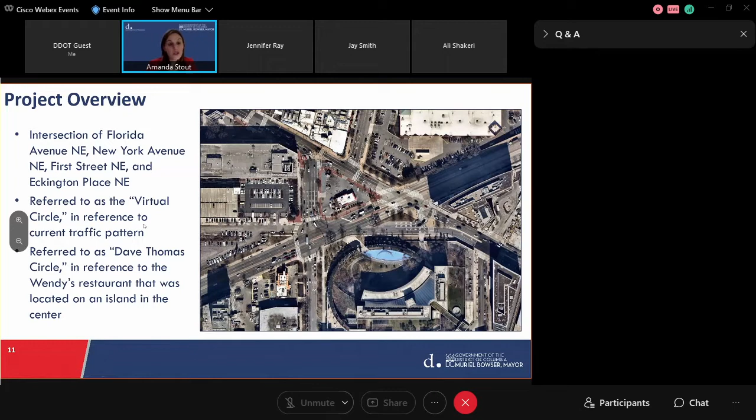So as many of you may be familiar with this project, we are tonight speaking about the intersection of Florida Avenue Northeast, New York Avenue Northeast, First Street Northeast, and Eckington Place Northeast. This area has often been referred to as the Virtual Circle or Dave Thomas Circle, in reference to the Wendy's restaurant that was once located on an island in the center of the intersection.

This series of intersections has been ranked among the top 10 hazardous intersections in the district. It is very challenging, as anyone who has been through this series of intersections understands. Wayfinding is complicated. There's a lot of jockeying for movements among drivers, and it's very difficult for pedestrians and bicyclists to navigate. That is the challenge posed by this existing traffic pattern.

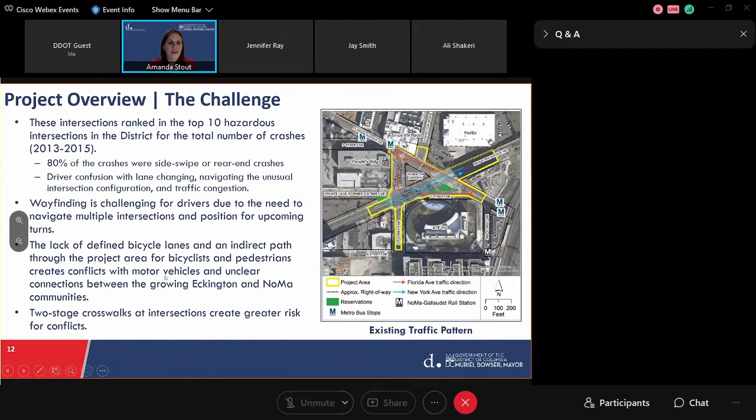And of course, there's a great opportunity for the District of Columbia to improve safety for all roadway users, particularly pedestrians and bicyclists, and to improve north-south and east-west transportation links across the city. This project is focusing on safety, and the reconfigured intersection will also create 3 new public open park spaces that have been designed with a really thoughtful, innovative landscape design, which we'll be talking about later in the presentation.

A brief overview of the history. Some of you on this call may have been involved in meetings in the past; others may be newer to it. Since about 2013, there have been multiple studies and public meetings for both this series of intersections and for the Florida Avenue Streetscape, a separate project from Florida Avenue from 2nd Street to H Street Northeast. That project will be starting construction in the spring of next year.

In 2018, with Mayor Bowser's leadership and funding commitment, she directed DDOT to pursue what was referred to as Concept 6, which meant the district would acquire that Wendy's property at the center of the intersection, and that would unlock the ability to redesign this series of intersections.

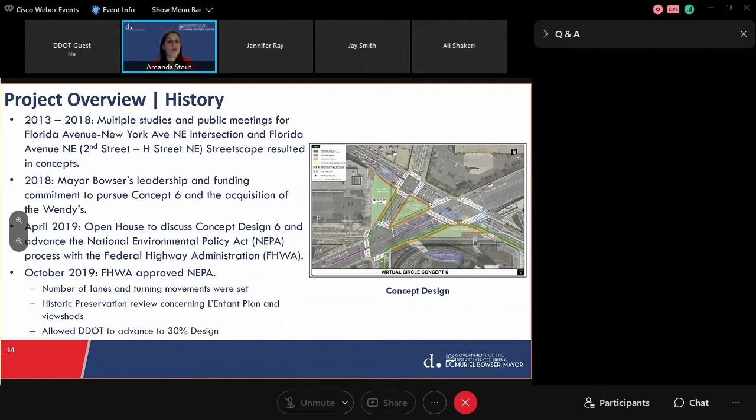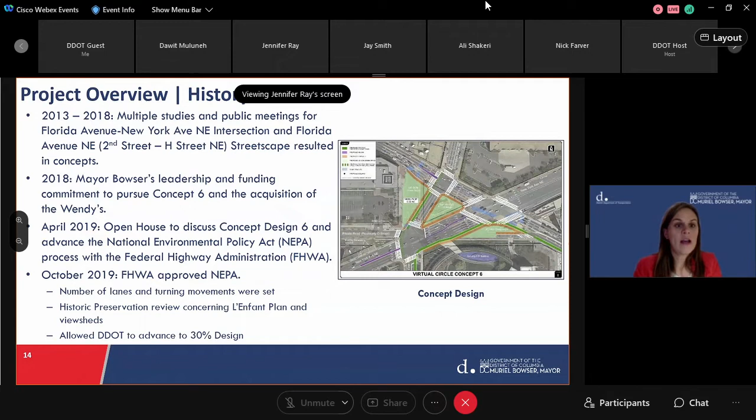From there, DDOT has had several other meetings. We held an open house in 2019 to discuss the NEPA, the National Environmental Policy Act, which was an important milestone for the project. When the Federal Highway Administration approved that portion of the project, that really set in place the number of lanes and the turning movements needed for this project. Historic preservation review was also part of that federal highway review, and at the completion of that mark, it allowed DDOT to advance to the 30% design stage.

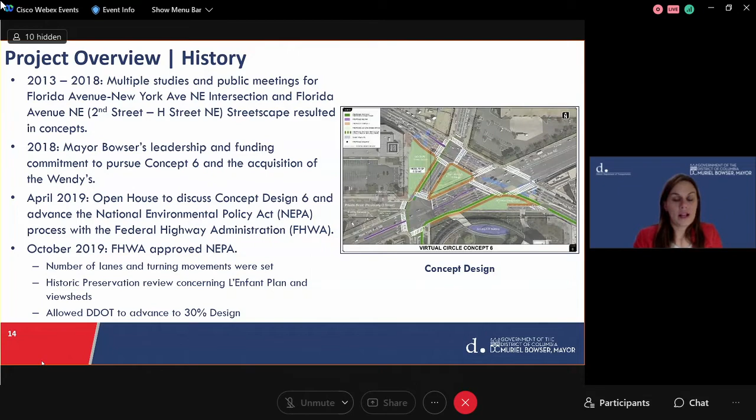DDOT has enjoyed a great partnership on this project with the NOMA Business Improvement District and the NOMA Parks Foundation. In June 2019, they worked with the Urban Land Institute to do a technical assistance panel that came up with some really interesting ideas that pushed this design in some positive directions.

In December 2019, there was a public meeting to talk about the preliminary design. In March 2020, the DC Office of Planning conducted a public life study, which also looked at how people are using this area today and made some great recommendations about how to push the design for the future.

In the spring of 2020, with the NOMA Parks Foundation, there were public meetings to discuss the concept designs for these 3 new public park spaces and how they can best be used by the community, and what types of amenities and urban design characteristics would benefit those spaces. Those spaces were also reviewed by the Federal U.S. Commission on Fine Arts, National Capital Planning Commission, and the State Historic Preservation Office.

Finally, in May 2021, we held a virtual public meeting, much like this, to discuss the 65% milestone design.

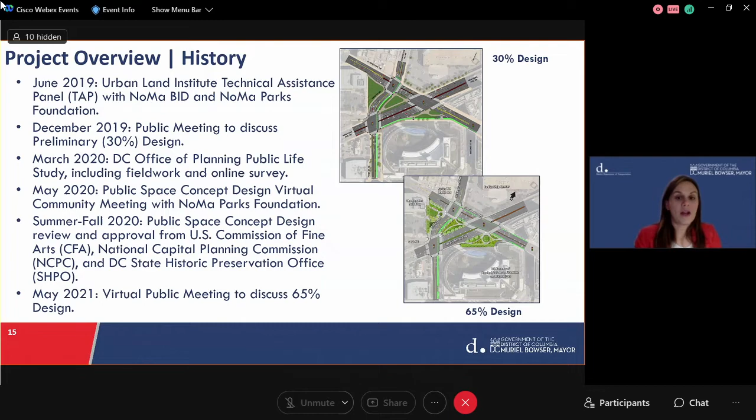Also wanted to talk about property acquisition and relocation. As I mentioned, the property at the center of the intersection needed to be acquired by the district, and we did so in accordance with federal and district regulations. In January 2021, the District of Columbia acquired title to that property by eminent domain.

So this is the final design for the project, a really important milestone in this very significant project. As I've mentioned, the focus of this project is on safety for all users, with particularly significant improvements to pedestrian and bicycle infrastructure. The focus of this redesign is making it safer, clearer, and simpler to travel to and from neighborhoods, travel across the district, and be better connected. New York Avenue and Florida Avenue are principal arterials and important corridors, but this project is not aimed at increasing vehicular capacity. It's aimed at improving safety for all.

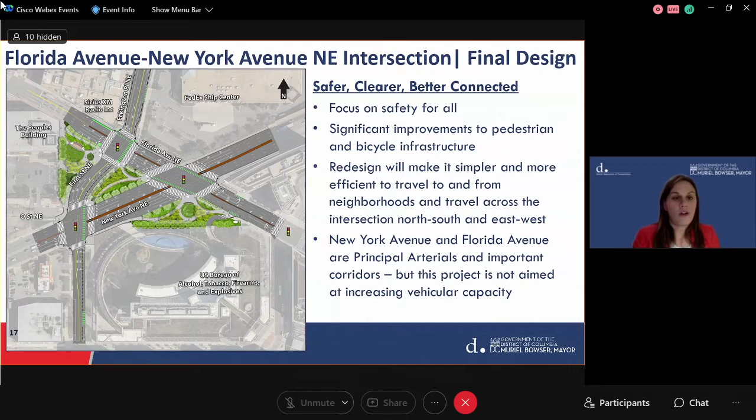We're also realigning and converting First Street Northeast to a two-way street, which will improve north-south connectivity from Noma to Eckington and make it easier for residents to get into and out of the neighborhoods.

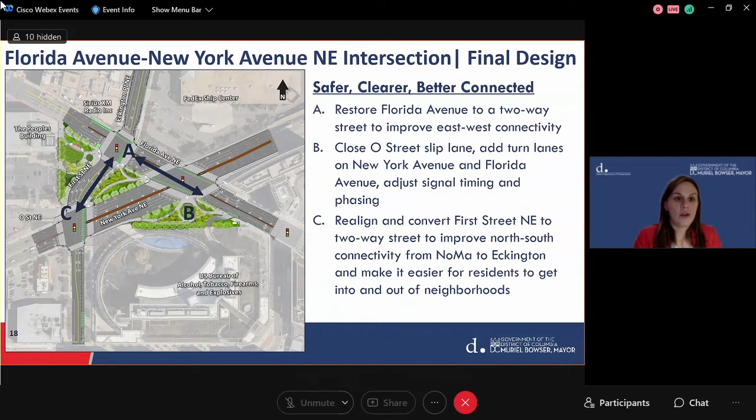Finally, like many DDOT streetscape projects, this project will do a number of other things: adding street trees, replacing street lights, upgrading curbs and ADA accessible curb ramps. We'll be adding new traffic controls, green infrastructure and improving drainage to improve water quality. Also maintaining some historic visual corridors consistent with the L'Enfant plan. So this project, in addition to what's being done in the roadway, is adding a number of other amenities to the streetscape.

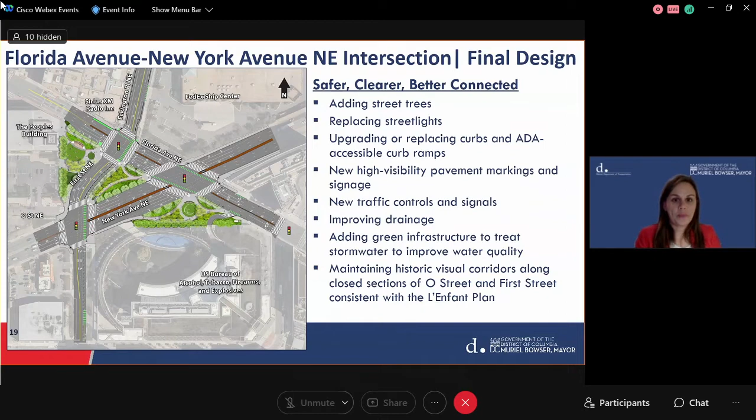Now we're going to talk about some aspects of the project that will benefit some specific modes. I'll start with pedestrians. For pedestrian safety, this new design will have clear, high visibility crosswalks to make the intersection safer and simpler to navigate. There'll be accessible pedestrian signals with leading pedestrian intervals. The medians on New York Avenue and Florida Avenue will be ADA compliant with at least 6 foot wide medians for refuge. By reducing driver confusion and making these intersections line up more clearly and logically, it will improve safety for pedestrians.

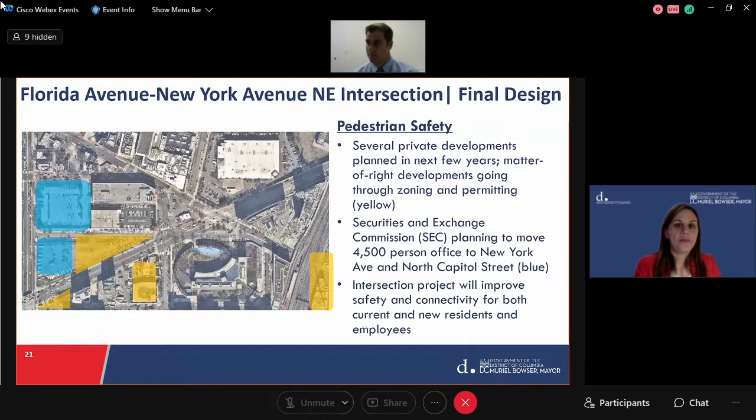And now I'm going to turn it over to Nick Farver from JMT. He's going to talk about a number of aspects of this project that will improve bicyclist safety.

All right, thank you, Amanda. As previously mentioned, bicycle safety and bicycle infrastructure is a major component of this project. Bike connectivity will be improved along Florida Avenue by continuing the protected bike lanes proposed in the 2nd to H Streetscape project and extending them through the intersection to connect First Street and Eckington Place.

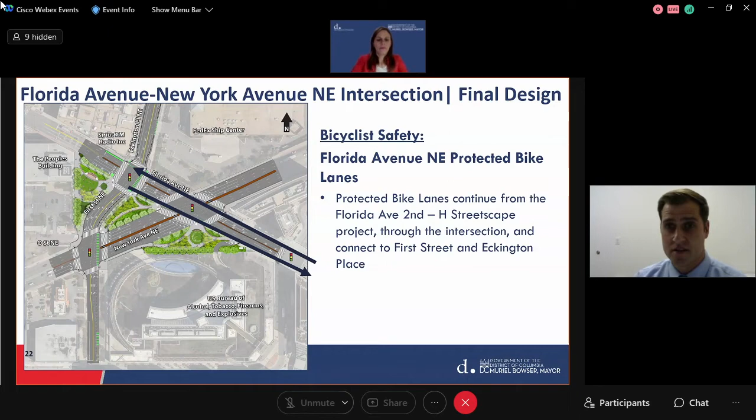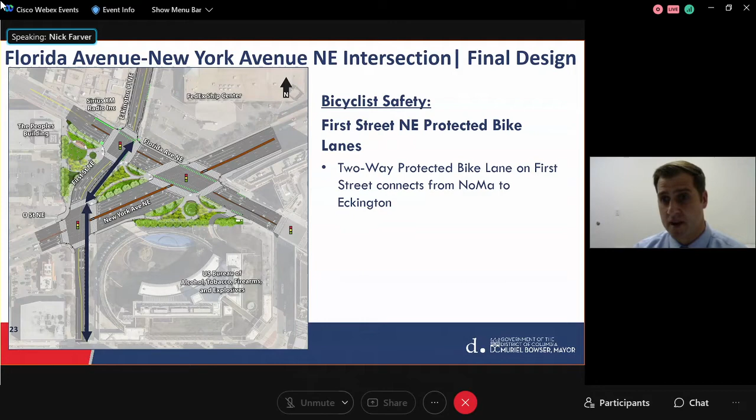Additionally, a two-way protected bike lane will be included on First Street from M Street to Florida Avenue to provide additional bike connectivity to and from the NoMa and Eckington neighborhoods. Speaking of bike connectivity, we noticed there was a missing link in bike lanes along First Street between M Street and N Street. So as an addition to the 65% plans, a two-way protected bike lane on First Street from M Street to N Street will be included in the design. This will provide continuous protected bike lanes from Union Station up through the intersection.

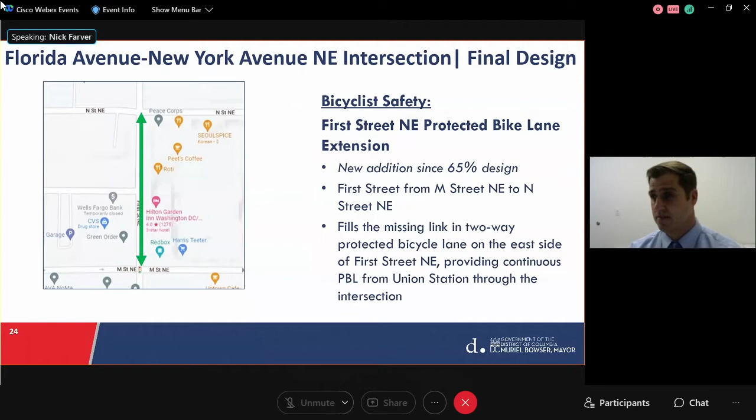Another addition to the 65% plans is the inclusion of protected bike lanes on Eckington Place from Florida Avenue to R Street. Along this stretch of roadway, there are existing striped bike lanes with parking adjacent to the existing curb, with 58 existing parking spaces. Shown here is the existing typical section of Eckington Place showing the location of the parking lanes, bike lanes, and vehicular through and turn lanes.

As an added safety measure, DDOT will convert the existing bike lanes along Eckington Place to protected bike lanes. In order to accommodate both protected bike lanes and parking, the protected bike lanes are proposed adjacent to the curb with a 3-foot buffer zone, which will include precast concrete units with flexible delineators spaced in between. This results in the loss of 6 parking spaces, making the total parking space count 52. Shown here is the proposed typical section of Eckington Place.

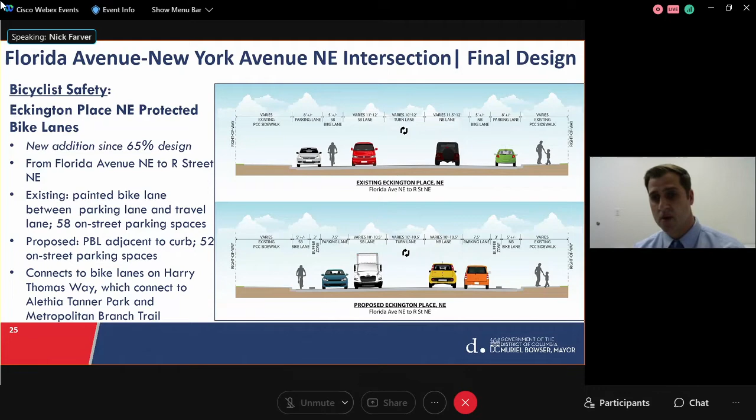The space to accommodate the protected bike lanes was obtained by reducing the vehicular lane width from 11 and 12 feet in the existing condition to 10 to 10.5 feet in the proposed condition. The bike connection on Eckington to the Harry Thomas Way bike lanes will be maintained, which also connects to Alethia Tanner Park and the Metropolitan Branch Trail.

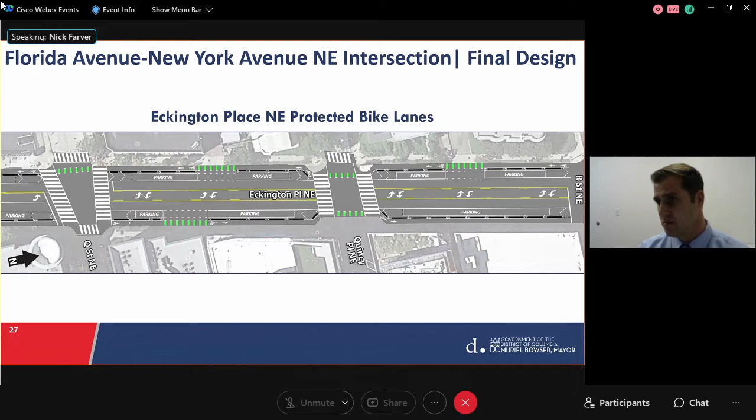We wanted to discuss some of the changes that have occurred to the bike lane pavement markings at First Street, Eckington Place, and the Florida Avenue intersection from the 65% design. Shown here, the westbound protected bike lane has been extended approximately 75 feet beyond the intersection to provide additional protection through the intersection heading westbound.

Additionally, a bike box has been included on the southwest corner of the intersection to improve safety for eastbound cyclists. Also, bike boxes on the sidewalk have been included to aid in the north-south bike transition along Eckington Place and First Street.

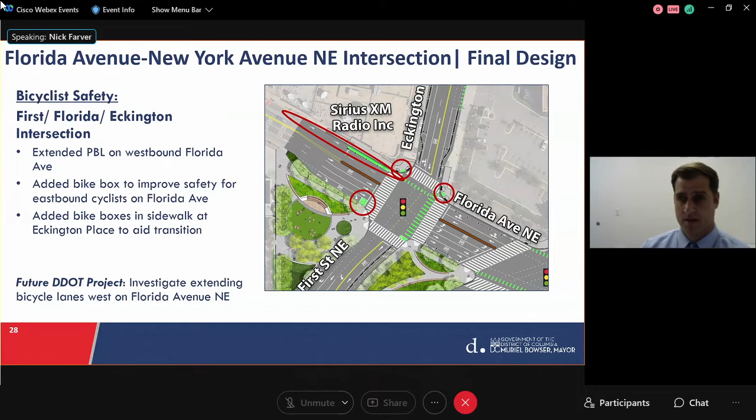This shows a zoomed out version of the entire project, with emphasis on protected bike lanes. What is shown here in green will ultimately be the project limits. You can see the Eckington PBLs and the First Street PBLs, or protected bike lanes, are included within the project limits now. What's shown in yellow are the protected bike lanes on Florida Avenue from 2nd Street to H Street. The interim project has been completed, and now the capital project will start in the spring of 2022. What's shown in purple are some of the existing protected bike lanes in the area as well.

Like I said, this slide emphasizes the protected bike lanes. What's not shown is also the Metropolitan Branch Trail, as well as many other bike lanes in the area.

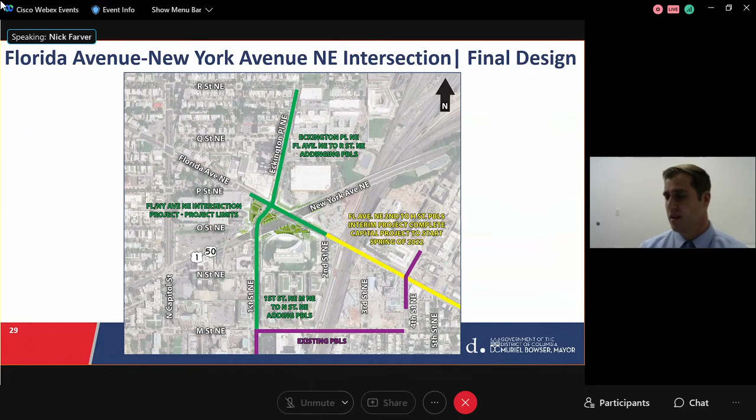Great, thank you. I'm going to talk about a couple other aspects of the design: safe connections to transit. There is currently a WMATA Metro bus stop for routes 90 and 92, which are on Florida Avenue Northeast. That stop is at the northwestern corner of this intersection, and it will remain in the future, with the bus line continuing to serve this community.

Also, the project in general creates safer pedestrian and bicycle connections to the NOMA Gallaudet Metro Station by making it easier to navigate this area. I'll also note that DDOT has a bus priority program taking a robust look at corridors across all 8 wards to determine where bus priority elements can be added to improve speed and reliability of bus service. Through that lens, DDOT will be looking at potential bus priority upgrades to these corridors.

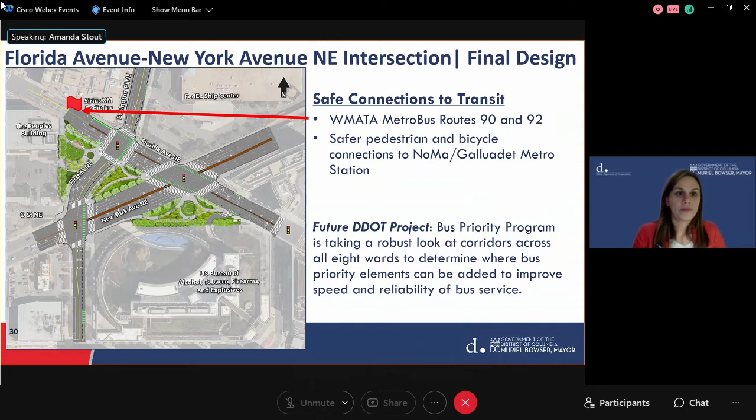I want to talk a bit about these 3 new public open spaces for the community. You can see them noted here. Parcel 1 is to the west, adjacent to the People's Building. Parcel 2 is in the center, and Parcel 3 is immediately north of the ATF building.

As I mentioned, DDOT has had a great partnership with the NOMA Business Improvement District and NOMA Parks Foundation, which really made this unique aspect of the project possible. The NOMA Parks Foundation hired New York City-based landscape architecture firm SWA Balsley, who came up with the concept and schematic design for these 3 new spaces. Their firm does a lot of similar work in other cities, looking at how they can create thoughtful, innovative designs that will be used by people in the midst of really busy urban settings.

DDOT will construct 3 new public park spaces as part of the intersection construction project. It is inherently linked, so at the same time DDOT is doing the roadway work and traffic signals, we will also be building these 3 open spaces. DDOT is happy to be partnering with the NOMA Business Improvement District, who will be maintaining these 3 public spaces in the future, because there are a lot of non-standard items that are not part of DDOT's typical portfolio but will require extra attention.

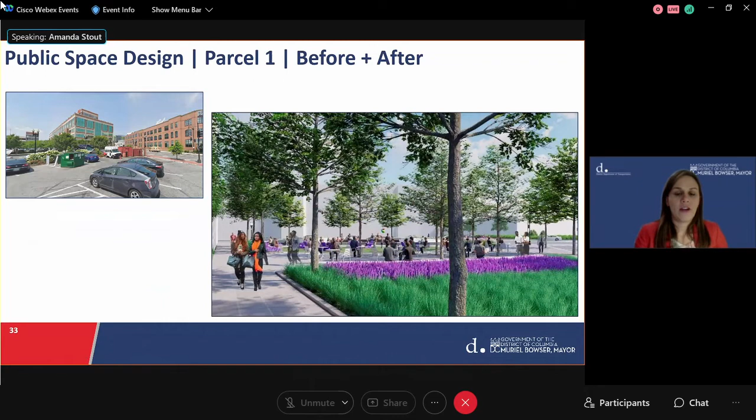To see some additional images, this is parcel 2 in the center. We talked a lot about thinking about shade and sunlight and making sure these would be spaces that people will use for a variety of different activities.

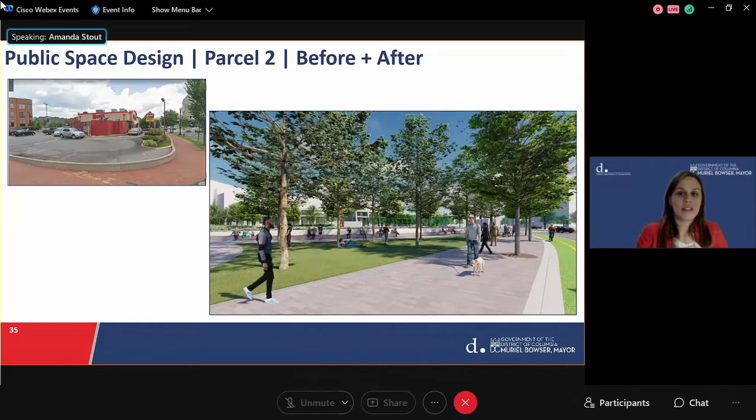Parcel 3, the one by the ATF building, has this really interesting play equipment, as well as movable furniture, lush trees, green spaces, benches, and a number of different amenities.

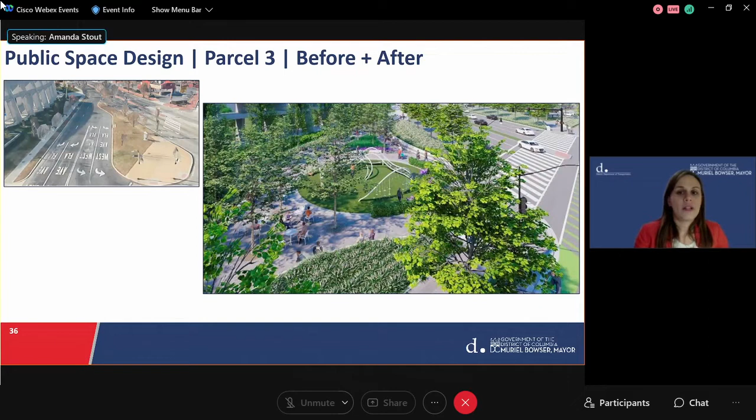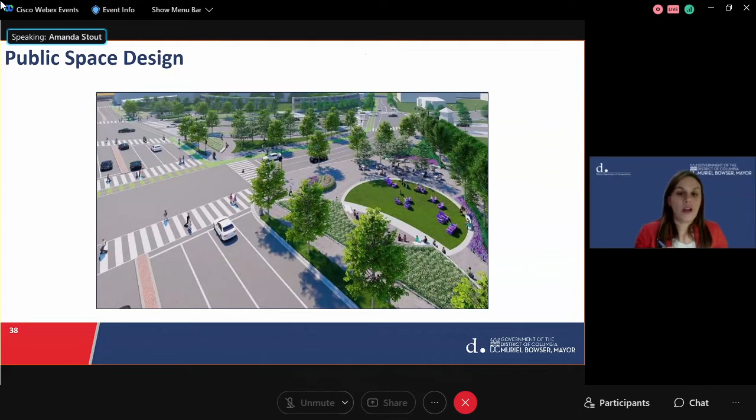This is something DDOT is excited to have be a part of this project. These 3 open spaces will be constructed at the same time as part of the larger intersection safety project.

As we've mentioned, the final design is now complete. There have been a lot of changes and updates to the design along the way in response to public feedback, and DDOT is really excited to be at this milestone for this very important project.

We're now looking ahead toward the construction phase. Starting this winter, we will begin the solicitation and procurement for a construction contractor, which will take a few months. We plan to start construction on this project in summer 2022, with construction lasting approximately 2 years.

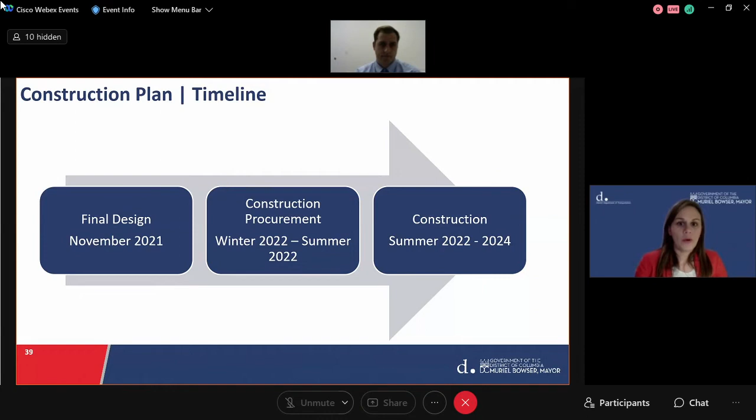Now Nick is going to talk through a bit more about the thinking that has gone into the construction planning for what that construction will look like going forward. I just want to give a general overview of the construction plan.

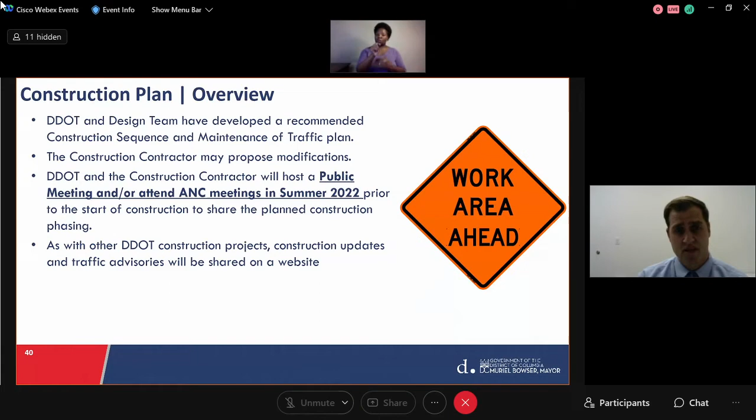DDOT and the design team have developed a recommended construction sequence and maintenance of traffic plan. However, the construction contractor may propose modifications for review and approval by DDOT. With that, DDOT and the construction contractor will host a public meeting and/or attend ANC meetings prior to the start of construction to share the planned construction phasing. As with all DDOT projects, construction updates and traffic advisories will be shared on the project website.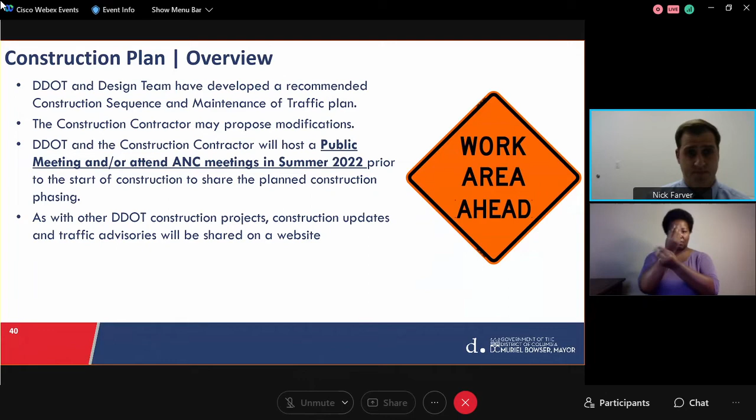I wanted to discuss a few of the guiding principles incorporated into the construction plan. All traffic control measures will be in accordance with DC's temporary traffic control manual, the Manual on Uniform Traffic Control Devices, better known as MUTCD, and DDOT's pedestrian safety and work zone standards. There will be safe accommodations made for pedestrians and bicyclists according to DC's Safe Accommodations Act.

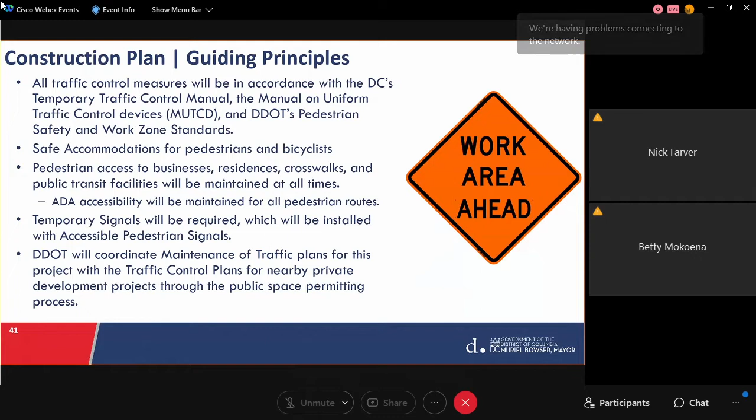DDOT will coordinate the maintenance of traffic plans for this project with the traffic control plans for nearby private development projects through the public space permitting process.

Continuing with some of the guiding principles, the goal here is to minimize impacts to the traveling public and, most importantly, prioritize safety. We want to maintain traffic and access on all roadways. For this project, we are not anticipating any long-term detours of any sort. This project will reduce vehicular capacity through the intersection during construction, which is anticipated to most likely result in some additional delays during construction.

The project work hours will be from 7 a.m. to 7 p.m. Monday through Friday, and work within the roadway that will be impeding traffic will be performed between the hours of 9:30 a.m. and 3:30 p.m. The project will utilize temporary lane closures to minimize impacts to the traveling public.

As the project starts, you might typically start to see some prep work, such as the contractor doing underground utility work and storm drain work. A lot of people want to know when the Wendy's will be demolished—it is anticipated to occur in the early stages of construction. However, as discussed earlier, the contractor may propose an alternate sequencing plan.

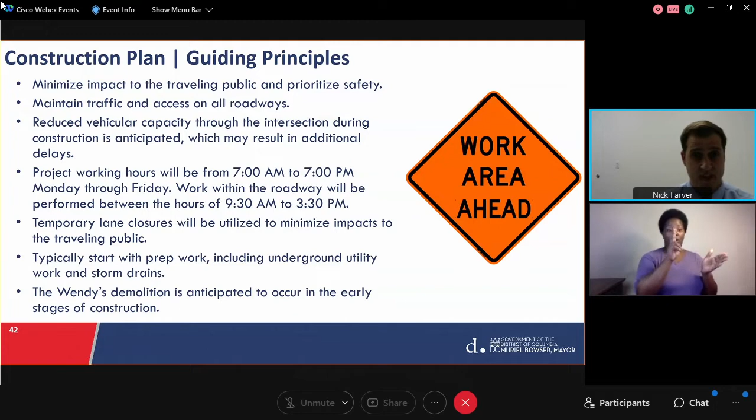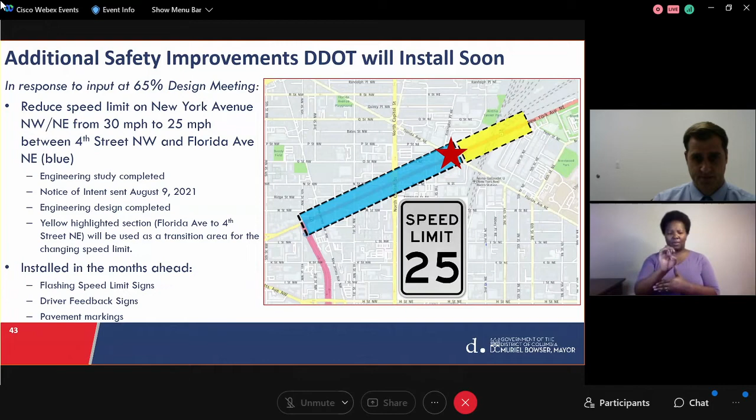So throughout this presentation, we've been talking about this capital project that DDOT will be installing to redesign this intersection. But in the meantime, before construction breaks ground next summer, there are a few additional safety improvements that DDOT plans to install very soon.

The first of these, in response to comments and discussion at our 65% design meeting in May, is reducing the speed limit on New York Avenue, a portion between 4th Street Northwest and Florida Avenue Northeast, shown in blue, from 30 miles per hour to 25 miles per hour. DDOT conducted an engineering study, sent out a notice of intent, and completed a design. The yellow highlighted section from Florida Avenue to 4th Street Northeast will be used as a transition area guiding that changing speed limit.

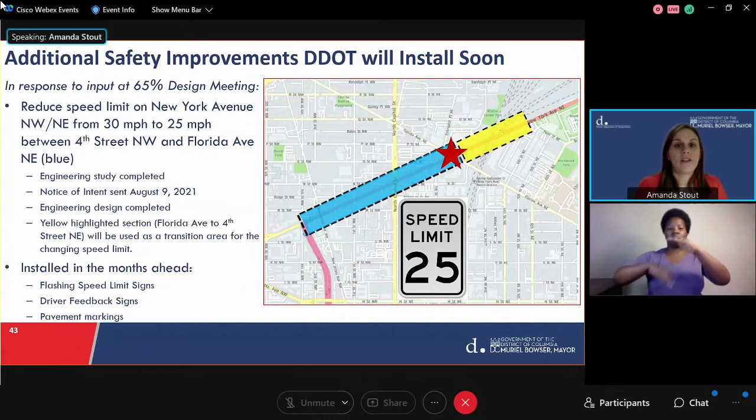In the months ahead, DDOT will be installing flashing speed limit signs, driver feedback signs, and pavement markings, as well as speed limit 25 signs to implement this change, which we think will have real positive benefits.

Another thing discussed at previous meetings is automated traffic enforcement. There is an existing red light camera at New York Avenue and Florida Avenue, shown in red on this diagram. In addition, DDOT proposes to add a speed camera on westbound Florida Avenue near 100 Florida Avenue Northeast, shown in yellow here, planned to be installed by early next year. Broadly, DDOT's approach to installing camera enforcement is based on traffic study investigations, evaluating crash history, proximity to traffic controls, and physical feasibility. These are the two cameras being discussed for this area.

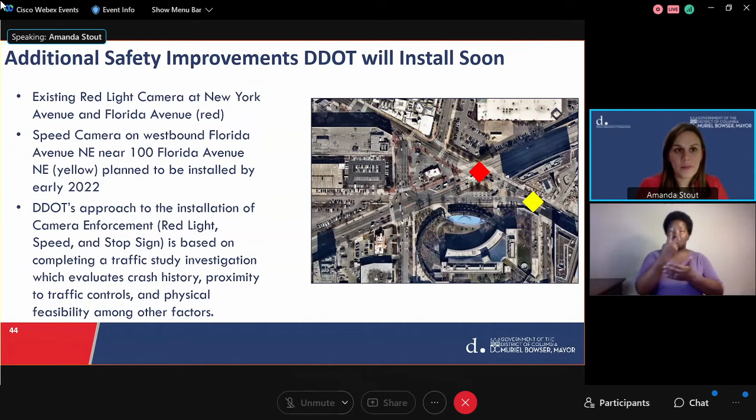Finally, there was a recent site visit a couple weeks ago to this intersection to discuss how challenging the bottlenecks are here today. DDOT took a look to see if there's anything we can implement in the immediate term, and there is.

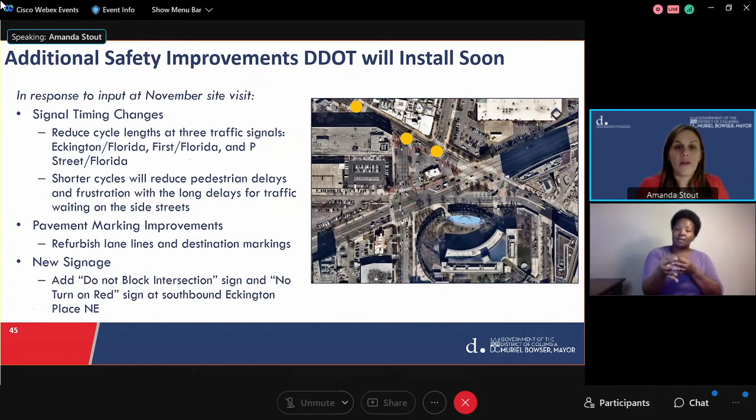We will be adding signal timing changes, reducing the cycle lengths at three traffic signals, shown in yellow on this map, at Eckington and Florida, First and Florida, and P Street and Florida. Those shorter cycles should reduce some delays and frustration. We'll also be refurbishing some lane lines and adding do-not-block-intersection and no-turn-on-red signs at southbound Eckington Place Northeast. In advance of the larger construction project, these should relieve a bit of the bottlenecks currently occurring.

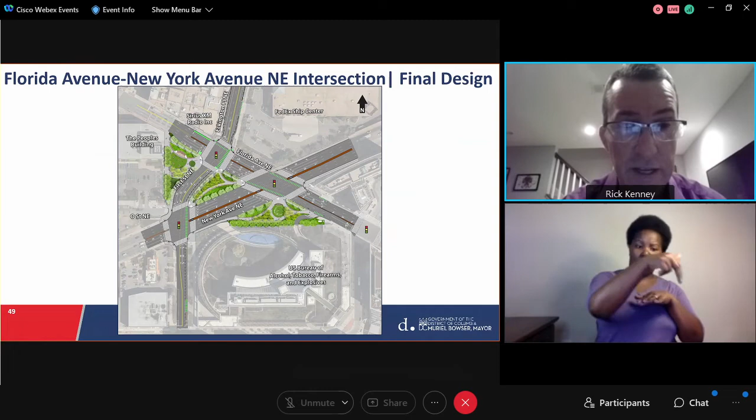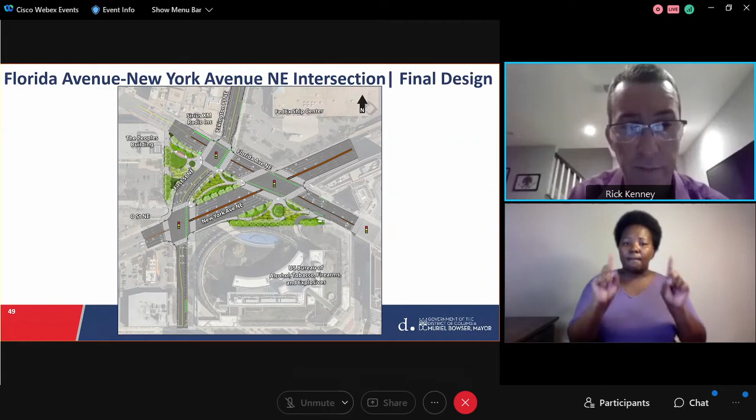Great, thank you. Good evening, Rick Kenney, I would just add one thing. I'm with DDOT's Deputy Chief Engineer. The present design of the intersection for a pedestrian crossing, say going west from Metro to points west, they have to cross a number of slip lanes and pause in pork chop islands. If you look at the total amount of asphalt and time spent crossing lanes, it's substantially more than what's achieved by this design. The project is not a road diet. It was not intended to reduce total throughput, but there is a substantial reduction in the number of lanes that pedestrians have to cross as a result of making this more of a traditional, close to perpendicularly aligned intersection. That's all, thanks.

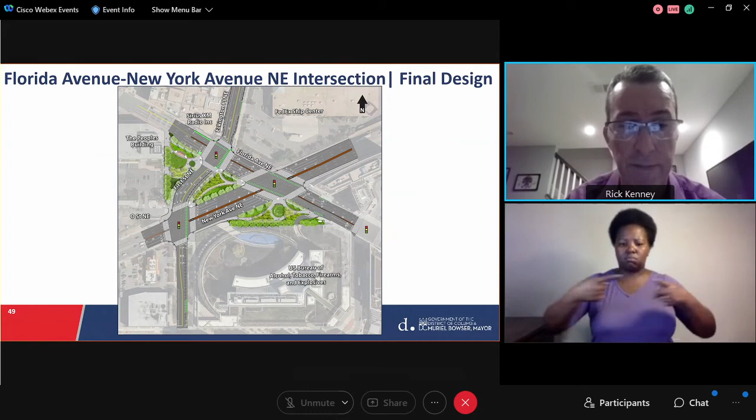Thank you so much. Moving on to the next question, an answer has already been provided back, but I will read both for the recording. Why is DDOT choosing curbside protected bike lanes on Eckington Place instead of extending the cycle track north? The response provided is that there's more available roadway on Eckington Place, and the protected bike lanes help narrow the roadway for pedestrians. In addition, the protected bike lanes connect better than a cycle track to Harry Thomas Way and R Street.

The next question that came in also had a response already provided, and again I will read them both out loud. What is being done at Eckington and Florida Avenue to protect westbound bicyclists from being right hooked by car drivers? The response is that physical protection of the bike lane is provided on Florida up to Eckington, helping to slow turns. In addition, there is a warning sign for turning vehicles to stop for bicyclists and pedestrians. Finally, green paint will be included through the intersection to highlight the path of bicyclists.

The next is another comment along that same line. The image wasn't on the screen for long, but it looked like the lanes were between the curb and parking, except for 3 parking spots in the intersection opposite Harry Thomas Way that the bike lane goes around. Can you reshare that image and clarify the plan there?

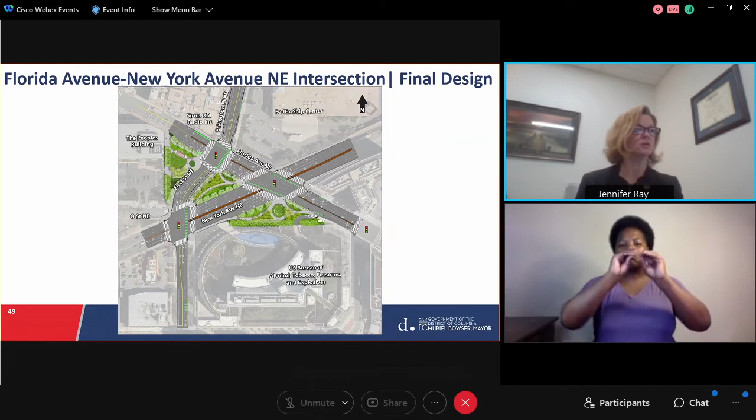So there is the image on the screen, if Nick or Jay would like to walk through further. Sure, Nick, you can take that. If you could share the Eckington enlargement, please. Slide 26. Yes. There you go.

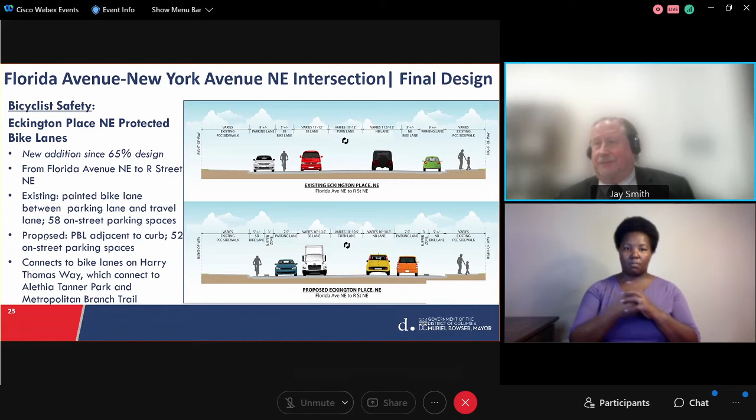The next question: have there been any major changes to address comments received on the 65% design? This looks very much the same, but with nicer renderings.

I guess I can take that one. Some of the comments we received included slowing the traffic down on New York Avenue. We've done that. We've lowered the speeds on New York Avenue to 25 miles per hour.

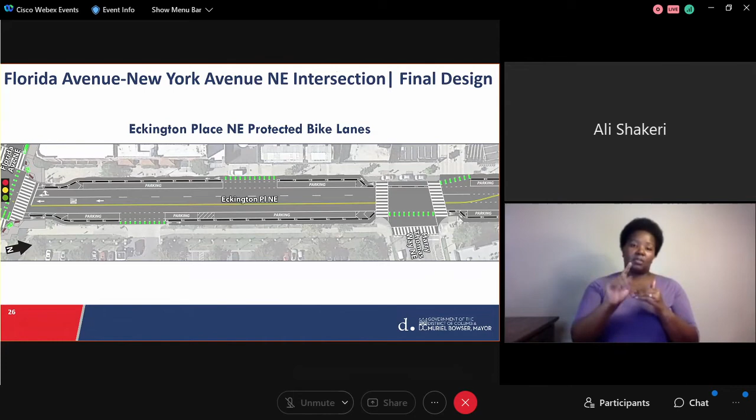The next question refers to not having an extension of the Florida Avenue protected bike lanes past First and Eckington, stating there are no connections west of this project between K and R streets, and why not extend. This was answered through the Q&A as well - the focus of the project is the intersection. The update to Move DC, the city's long-range transportation plan, recommends extending a bikeway west of the intersection, and DDOT will need to study this as a separate project.

The next question: are sustainable native plants and trees being selected for the green spaces? All planting is going to be installed per DDOT urban forestry direction, so yes, they will be sustainable plants within the area. There'll probably be a lot of perennials installed throughout the plaza areas, and that includes native plants, yes.

The next question: is there automated traffic enforcement of drivers who block the box? This was also answered through the Q&A box - DDOT does not currently field automated enforcement systems for do-not-block-the-box enforcement.

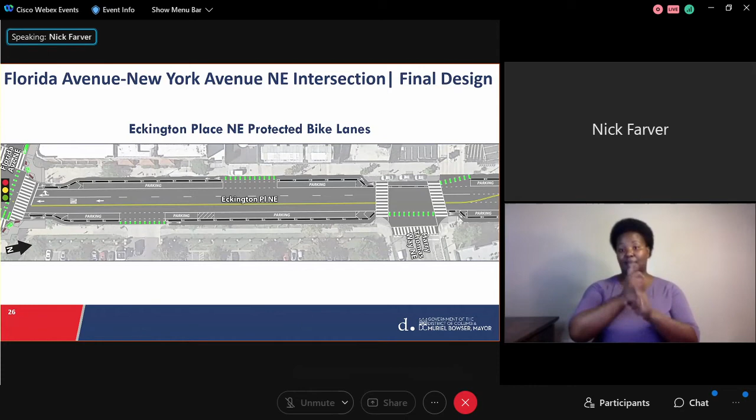I can answer that, Jennifer. I think the answers really were that there was the NEPA study, or the NEPA process, done through FHWA. The travel lanes, the median widths, all that was established at that time, and that's kind of it.

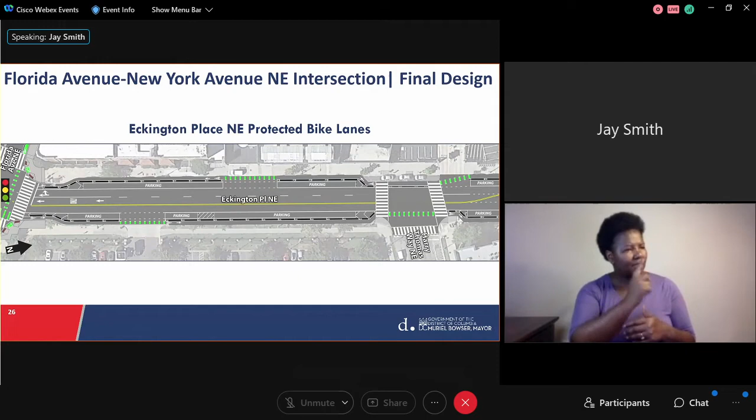The next question also has to do with the number of lanes of traffic. With 9 lanes of traffic, how long will the walk signal be across New York Avenue? And will there be no beg buttons? What was that last part, Amanda? What's written here states, will there be no beg buttons? And I'm wondering if that's supposed to be pedestrian buttons.

There will be push buttons at all the crosswalks. There'll be accessible pedestrian signals there also. They're high visibility crosswalks. We're using basically the latest design standards and thought on how to provide pedestrian safety at intersection crossings with this design. So I hope that answers the question.

The first part of the question was, how long will the walk signal be across New York Avenue? Nick, do you remember the crossing interval time? I think it's 3 feet per second, but I don't have the exact numbers on me right now to measure the width. That length times 3 is what you're going to get. So it should be more than adequate time to make that walk from one end to the other side of the intersection.

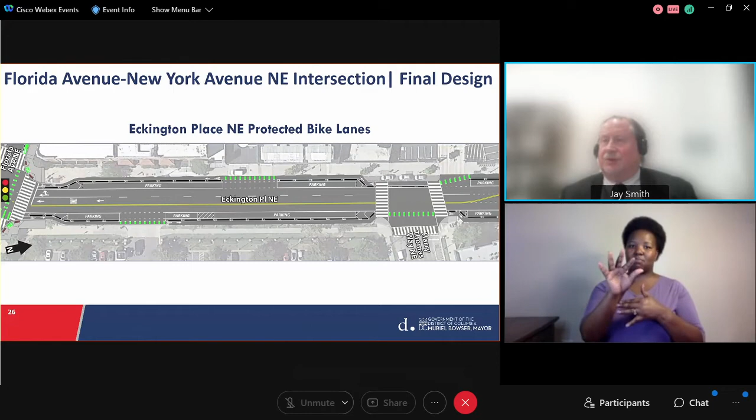We also incorporate the pedestrian interval, which provides some time between when the light turns red, you see the walk signal, and you start to cross. There's about a 6-second delay for the green time for the adjoining intersection movement. So that gives the pedestrian some additional time to cross the crosswalk before the adjacent traffic signal turns green, meaning you have more time before turning vehicles start going into the crosswalk. That's another improvement we incorporated.

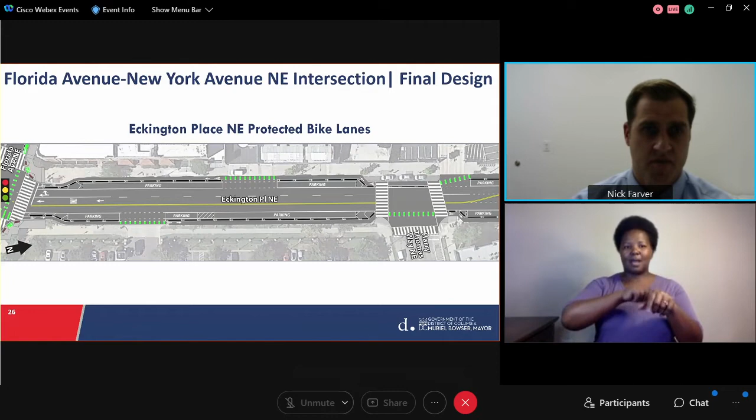Just to clarify, I'm sorry, it's 3.5 feet per second that will be the time for the countdown on the APS. So whatever that distance is, like I said, 3.5 feet per second.

The next is just appreciating a follow-up conversation, and there is an answer in here already, so I'll pause if there's additional comment from the project team. For someone coming south from Harry Thomas Way, it means crossing the street twice in a block, which means cyclists won't do it, they'll just go on the sidewalk. The road would be narrowed the same amount if you include a cycle track, right? It's just a matter of whether the bike lanes are on both sides or one.

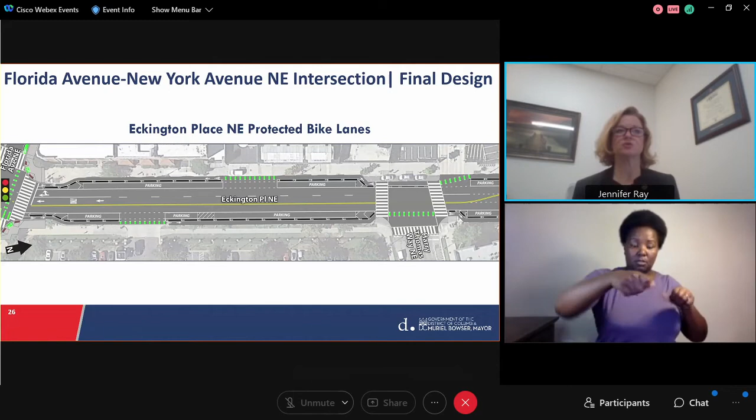So the question was really, the road would be narrowed the same amount if you include a cycle track, asking if that is correct. And the response is that the protected bike lanes on Eckington take up 16 feet of space versus the 10 to 12 feet for a cycle track.

The next question: to avoid eastbound traffic constantly running the red light as it turns right from Florida Avenue onto First Street Northeast in the current configuration, which is a major source of gridlock, why aren't the signal cycles on eastbound Florida Avenue synced up so that cars can stop at P Street Northeast before they reach the light at First Street Northeast and Florida?

I know there were a lot of roads thrown in there. So it's really about eastbound traffic running the red light as it turns right from Florida Avenue onto First Street. Why aren't the signal cycles on eastbound Florida Avenue synced up so cars stop at P Street before they reach the light at First Street and Florida?

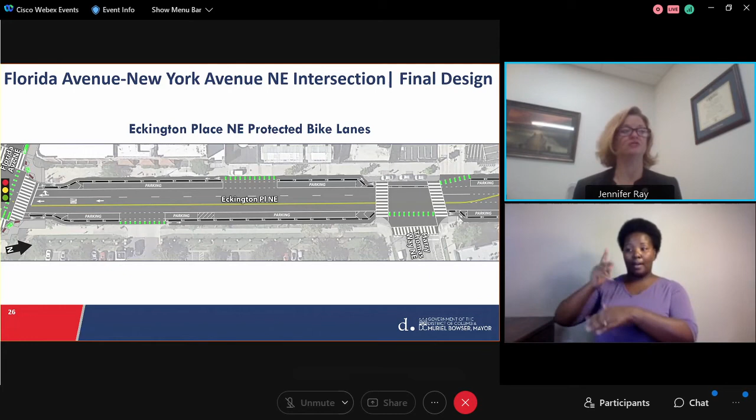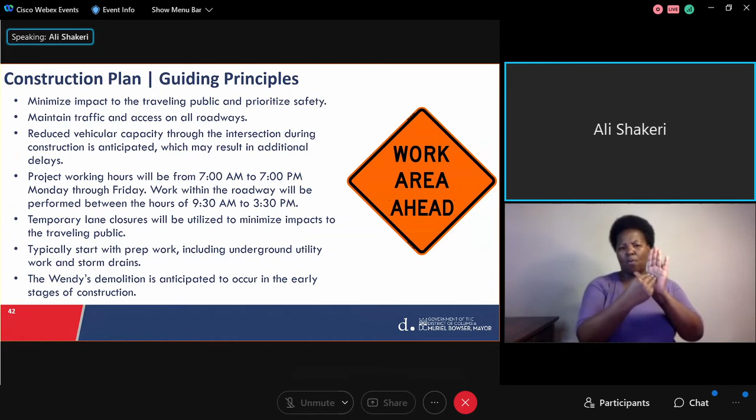I can just try to answer this question. Again, it's very hard to analyze and do traffic signaling by discussion. We've modeled this intersection as it exists, and our traffic engineers work hard. Again, the traffic signal is like a balloon—if you push from one side, it goes out the other side. So every second of any traffic signal has a major effect on how this system works at a complicated intersection like this.

Believe it or not, since we constructed this about 10 years ago, we have several times looked at this intersection and tweaked the signal timing to make it the most efficient, and that's hopefully why we are doing the project—to completely make it safe and make sure that people walking there, bicyclists, and traffic can cross this intersection safely.

Next question: at previous public meetings, there were comments regarding and a request for lane reductions. This is not shown to be incorporated. Why? That was the first question, and I thought Nick provided a reply to that question.

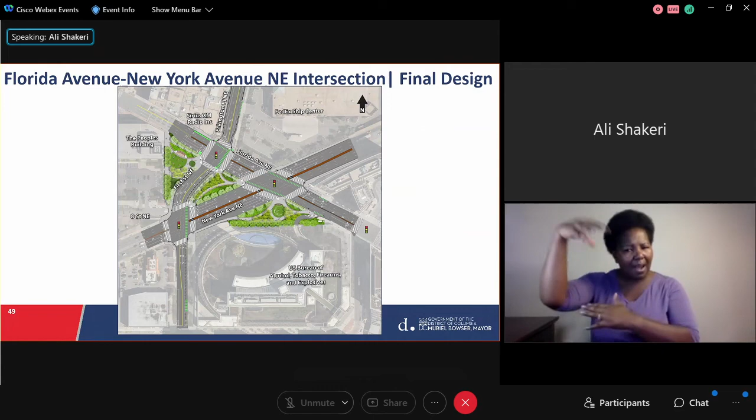Again, I don't think this is going to have that big an impact for the traffic and people living north of the intersection. I constructed this about 10 years ago from the other configuration to what exists today, and the way we approached the construction sequencing, the impact was minimum, but there is actually more impact to New York Avenue traffic and Florida traffic, especially during rush hours.

But I don't think there's going to be that much impact to Eckington. Again, I understand people trying to use Eckington to leave the neighborhood and go south might be affected, but the neighborhood itself shouldn't be that much affected.

Were raised crosswalks considered for any parts of the project? Given the volume of traffic and type of arterial road, raised crosswalks just would not be appropriate at these locations.

So a number of questions here rolled into one, and I'll just break them apart. Could you add cameras further east on Florida on either side of Trader Joe's? And just going through the other statements: worried about pedestrians waiting at the furthest west corner of Florida and First, and too many cars rush westbound on Florida across New York Avenue—are you shortening the light westbound on Florida? So there are 3 in 1 here, we'll go back to the first: could you add cameras further east on Florida Northeast on either side of Trader Joe's?

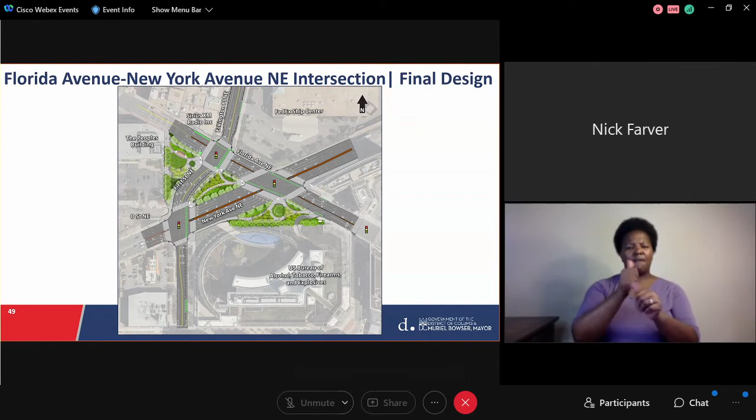This is a follow-up from a previous question regarding the protected intersections. Why wasn't there enough space on the protected intersections? And would there have been enough space if there were fewer lanes for cars?

I assume the person is referring to Eckington. The FedEx property comes out into the actual back of the sidewalk there, so we tried to fit a little eyebrow-shaped island in there to provide protected space for bikes, but we could not fit it considering the sidewalk, the roadway, and the bike lane, which we had to incorporate into the road. So unfortunately, there just was not enough space to fit that in there.

And we need to maintain the lanes that we have based on our NEPA approved document. So the lanes are specified by our traffic studies and are approved by NEPA. So you can't really reduce the lanes.

Another question regarding signal timing: will pedestrians have dedicated time to cross and cars dedicated time to turn in areas where the two might conflict?

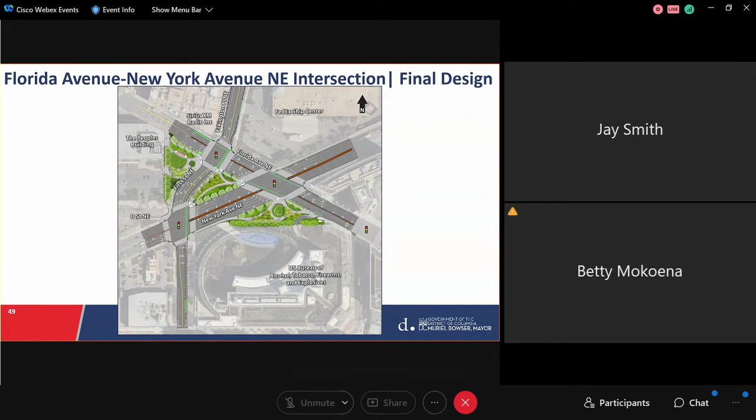In the 65% design meeting, the concern was about having to close a lane of traffic to mow the grass or maintain the landscaping. So it's going to be a brick median instead.

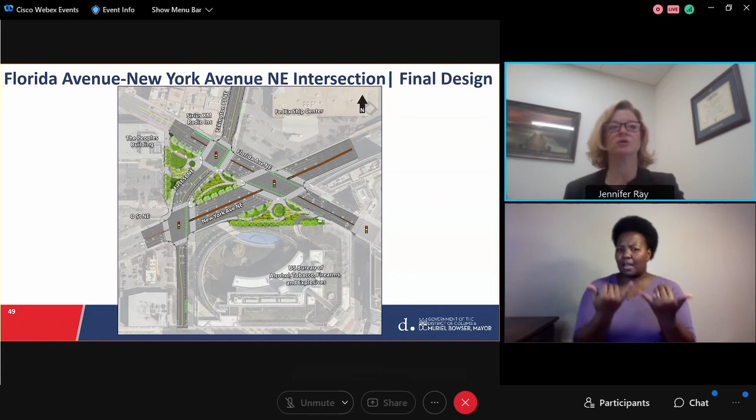All right, this question pertains to the park design, asking about some amenities for the park design. Are there any opportunities for a set of pull-up exercise bars at the play area on the southeast end of the park? If not, could something small be added, or is the park design finalized? And what type of play areas are proposed there?

I can start, Jay might remember better. So I think you're referring to parcel 3, north of the ATF building, which has a play equipment structure designed for both children and adults. The design team looked at how parks and public spaces are activated in other cities, and this is the type of equipment they recommended, discussed throughout the concept planning. The question was whether it could be used for exercise or other types of play. But the designs for those spaces are finalized now.

Thank you. Probably right back to another question regarding the parks, which I know this is our intersection here, but as they're related to each other also. Last time the landscape architects mentioned having some sort of noise mitigation devices so you can enjoy the parks without having the traffic noise. Is that still the case?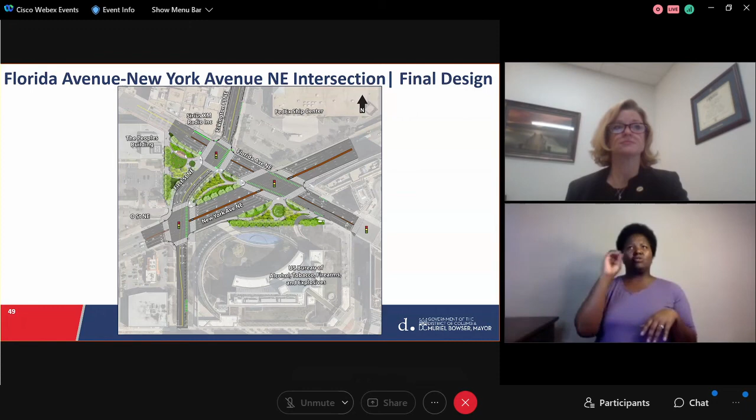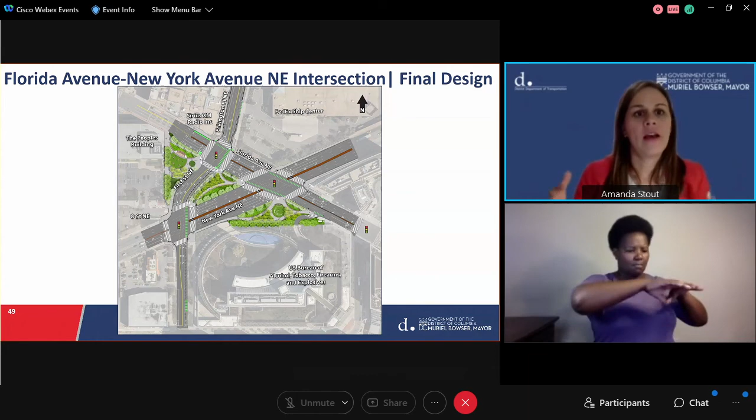I think so. I recall one of the things discussed was the kind of berms in the landscape - concrete benches, berms, and trees. The design was intentionally done both to provide a sense of safety and security when you're inside the park, but not too much privacy that you feel isolated from a security standpoint. Some of that is also based on buffering noise and congestion from cars. A lot of those aspects of the landscape urban design were things the design team factored in to make these spaces as usable and user-friendly as possible. If any of my colleagues want to add to that.

I'll just mention that at one time the design included screens that SWA Balsley suggested would help, given this is such a busy intersection with a lot of traffic. But the Commission of Fine Arts suggested they weren't appropriate, so they were removed from the design. That's right.

Another question: why opt for a red light camera on New York Avenue instead of a speed camera? Drivers coming down New York Avenue are more likely to speed than jump a red light. This was answered in the Q&A already - the red light enforcement camera requires in-ground construction and hence is included in the project. If speed enforcement is determined to be needed in addition, it can be added at that time, as in-ground construction is not needed for the placement of that camera.

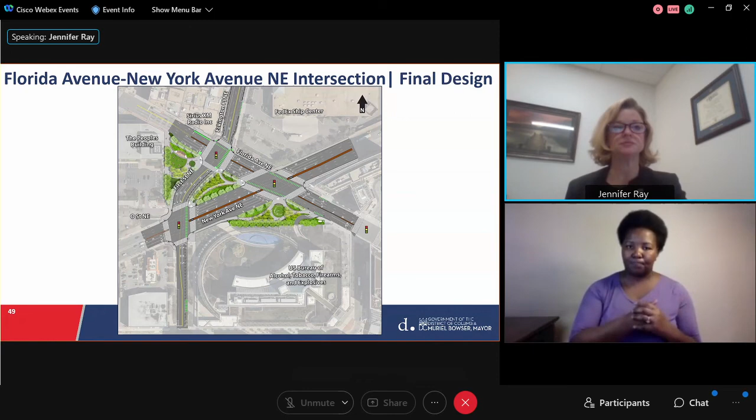Another question related back to reducing the number of lanes. I know this was asked early on and answered, but Nick, if perhaps you can just discuss it again - why are we not able to reduce the number of lanes?

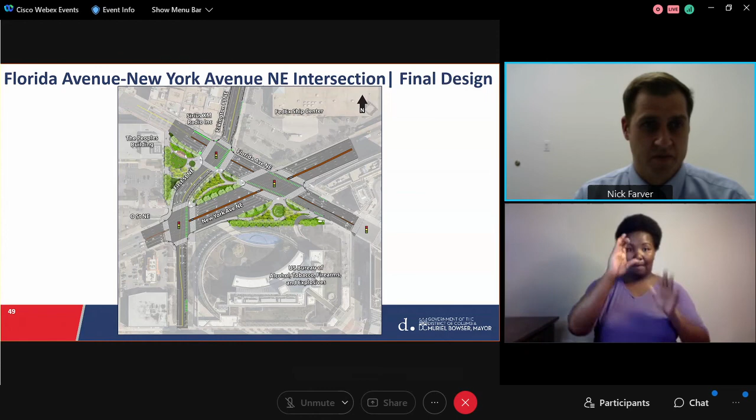Sure, Jennifer. So the NEPA evaluation was done, and as part of that, a traffic analysis was also done. Through that analysis, the process DDOT went through determined that the number of lanes you see on screen is what was going to be efficient to maintain traffic. We're not trying to increase the level of service or throughput through this intersection - it's more of a safety project, but we are required to maintain what is there. So per the NEPA process and through FHWA, this was the final result.

I'll also add, as Rick discussed earlier, that we're closing those slip lanes north of the ATF building now at O Street. Right now there are still a lot of lanes of asphalt, creating a multi-stage crossing with different turn pockets and a confusing intersection. So by squaring up this intersection, we still needed to add some turn lanes and make sure some movements were possible. But closing off that O Street slip lane area was really important to the project, making sure this all works together holistically - the signal timing, the number of lanes, the timing for pedestrians to cross, it all is synced up together to create a clearer intersection.

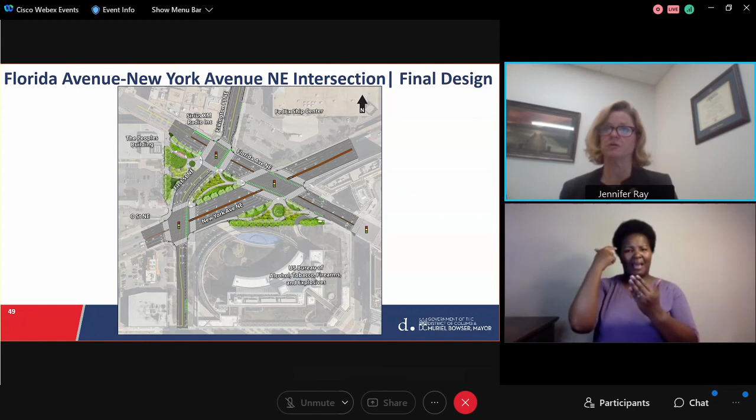Another question that was asked early on, but we'll circle back to this as well, really talking about the recommendations that have come from the public - what has been incorporated into this final design. Jay, I believe you had answered this earlier, talking about a number of changes from 65% to the final design, which were very much based on comments and additional analysis completed. So if you could just share again, what are the changes taken into the current design from public comments? Yes, we listened to the comments we got at the 65% milestone level of design.

We slowed traffic down on New York Avenue. We reduced the speed limit to 25 miles per hour. As far as speed enforcement, there's a stop light enforcement camera on New York Avenue, and a planned speed camera that'll be installed on Florida Avenue east of the intersection before the end of the year.

We incorporated protected bike lanes along Florida Avenue and First Street, and we incorporated bike boxes and protected bike areas at Eckington, First Street, and Florida Avenue. We extended the protected bike lanes up Eckington to R Street, and also completed the link between M and N, connecting the whole network of bike trails so that we have a connection between north and south here.

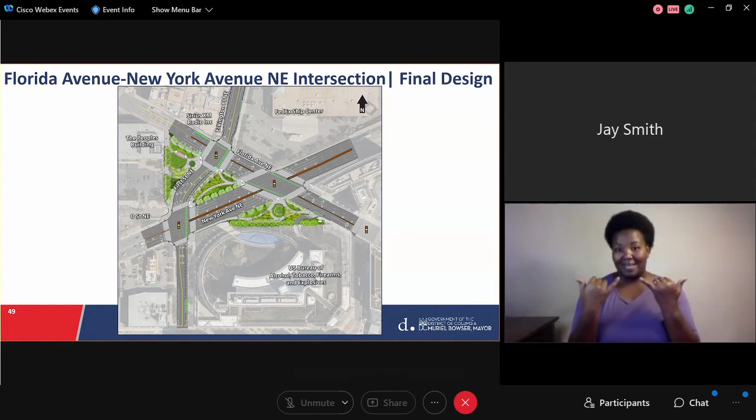We are coming towards the end of our time this evening, so I do have one more question that is related back to a question asked earlier regarding protected intersections. When we replied to it, we talked about it in respect to one intersection. The question is, what about with all of the different intersections? Could there be these protected intersections, looking at each of the different intersections involved in this project?

Earlier when we answered this, I believe Jay provided a response to that question. The question actually had 2 parts, and the second part was, if we do that, would it require reducing the number of lanes? And the answer is yes. Since we are not reducing the number of lanes, it was not possible. If it was possible, the design team would incorporate it. And we tried our best to design the details such that, as everybody said, we improve the safety and mobility of pedestrians, bikes, and vehicles throughout this intersection.

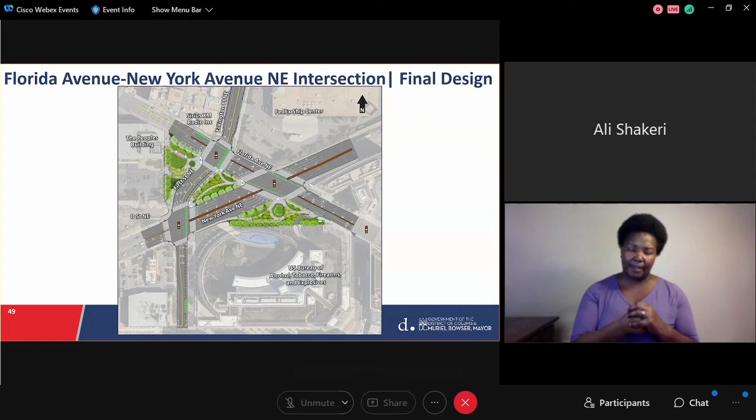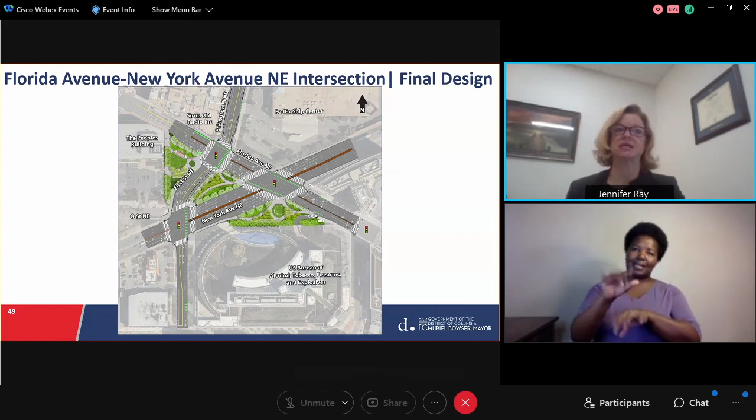One final question, we're able to get one last question in here. This goes back to traffic signal timing. Will the pedestrian signal cycle happen throughout every single traffic cycle? Will that be incorporated, or will it require the push button to be pushed?

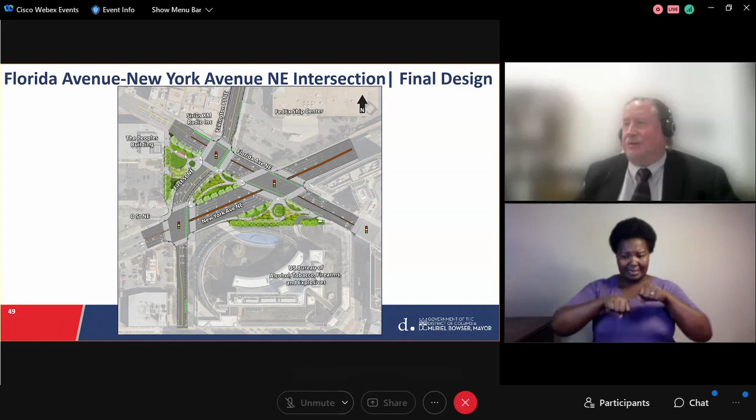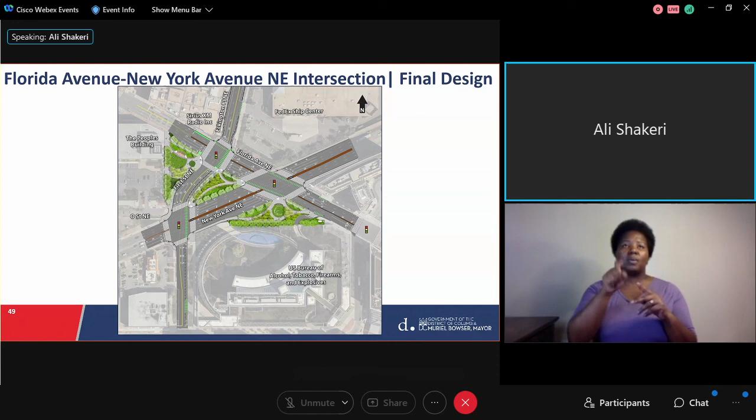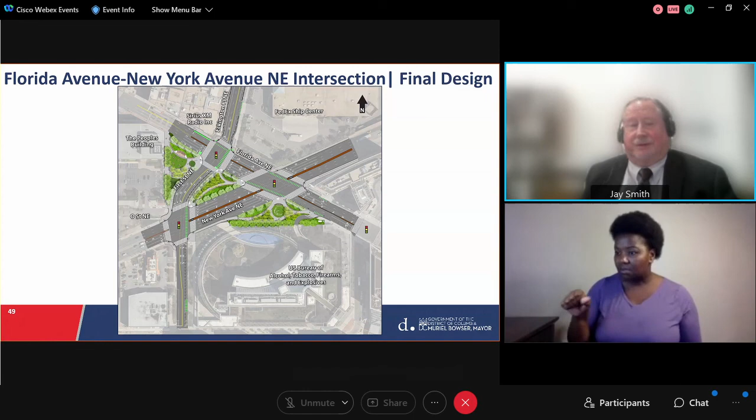I think there are push buttons available, but at all the intersections they provide safe crossing for pedestrians. Yes, we will be providing push buttons at all of the intersections that are signalized. I think the cycle incorporates a pedestrian phase automatically, but there is also a push button to make sure the push button has the chirping sound, a combination that provides help for people who need to cross these intersections. You don't have to push the button to have a pedestrian phase. If you stood there and forgot to press the button, there'd still be a pedestrian phase. It'll come up at every cycle.